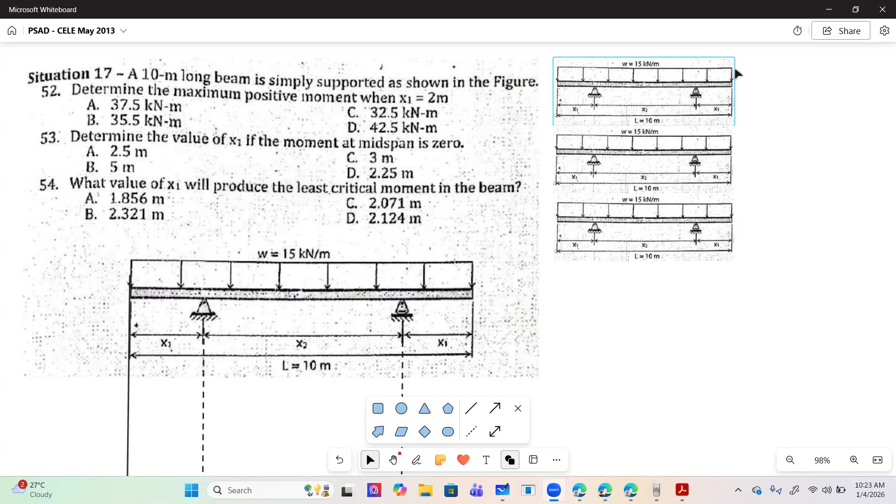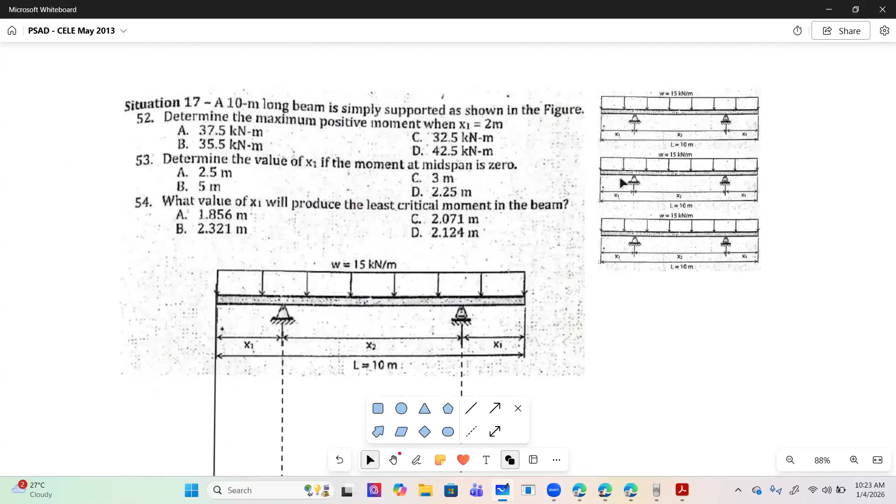Let's draw the shear and moment diagram real quick. We need this for visualization, so we can visualize it properly.

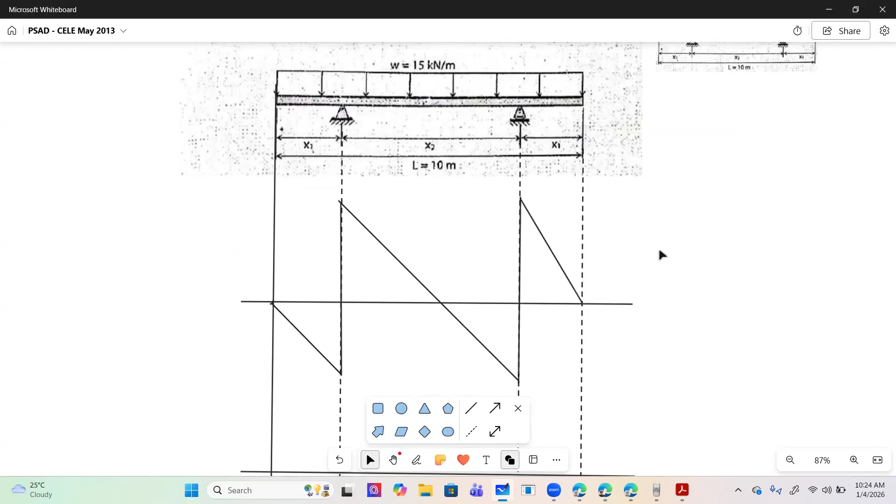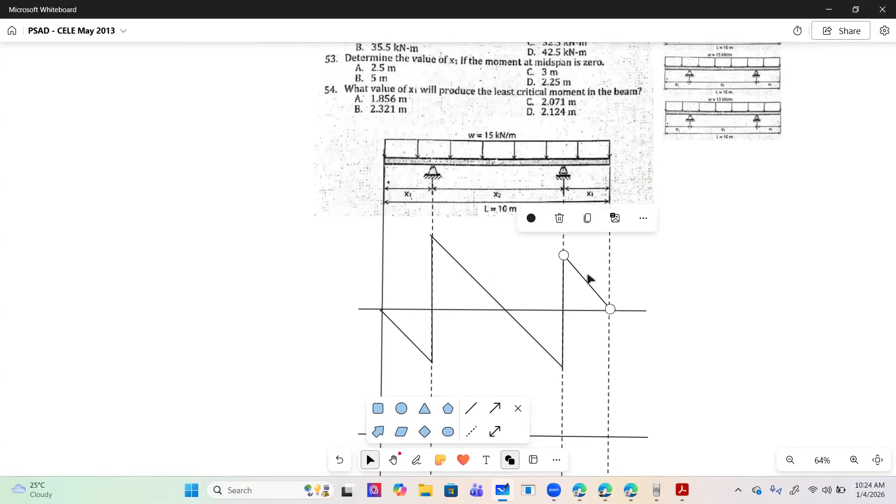That's the shear diagram. For the moment diagram, we should already master how shear and moment diagrams relate at this point. So for the moment, it's negative increasing, second degree, then positive decreasing. Actually, this is where the shear crosses zero, so that's where the moment is maximum, which should be at the middle, right?

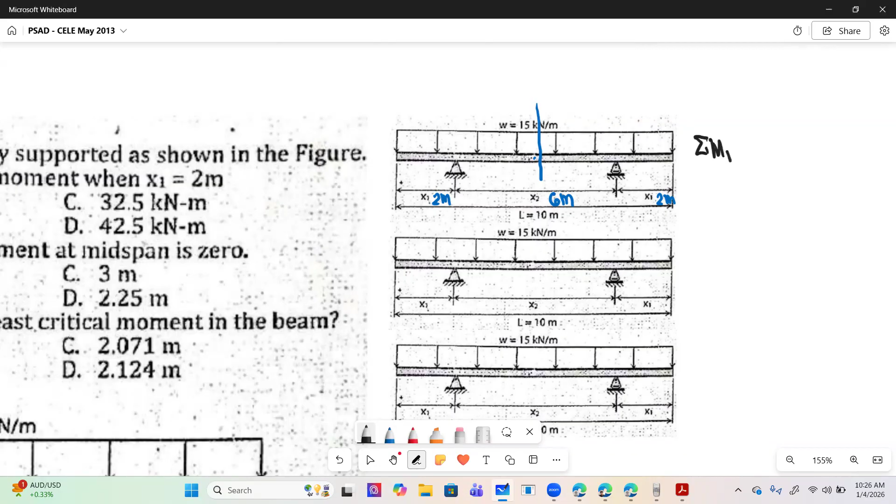So, summation of moment at midspan gives us the maximum positive moment. That's Mmax.

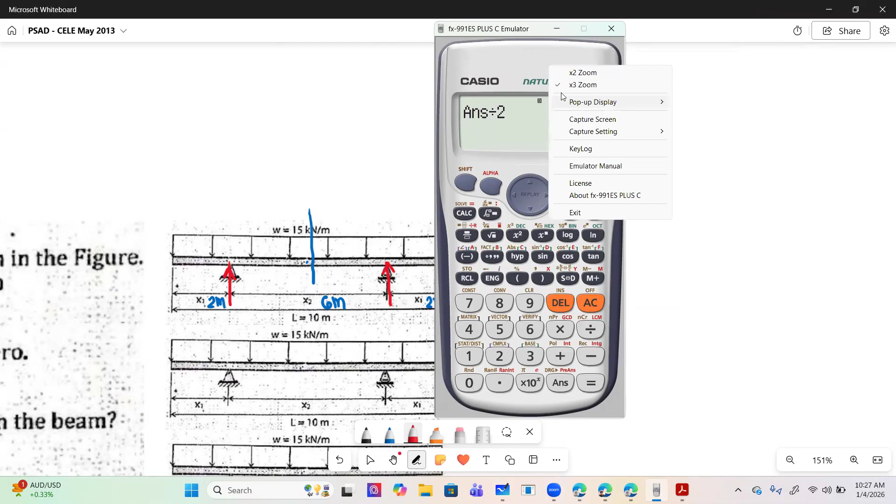So we have this maximum moment, M max positive equals 75 times half of x2, so that's 3. Then we subtract the negative part. Positive is what makes the beam smile, of course.

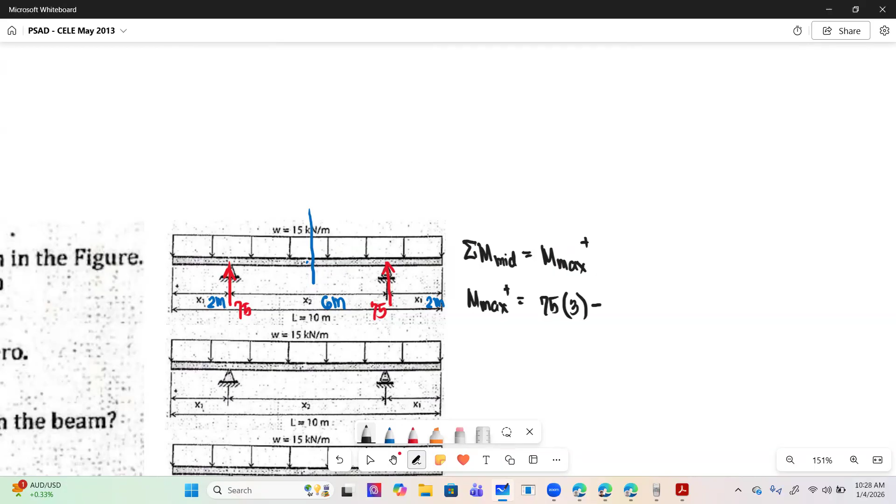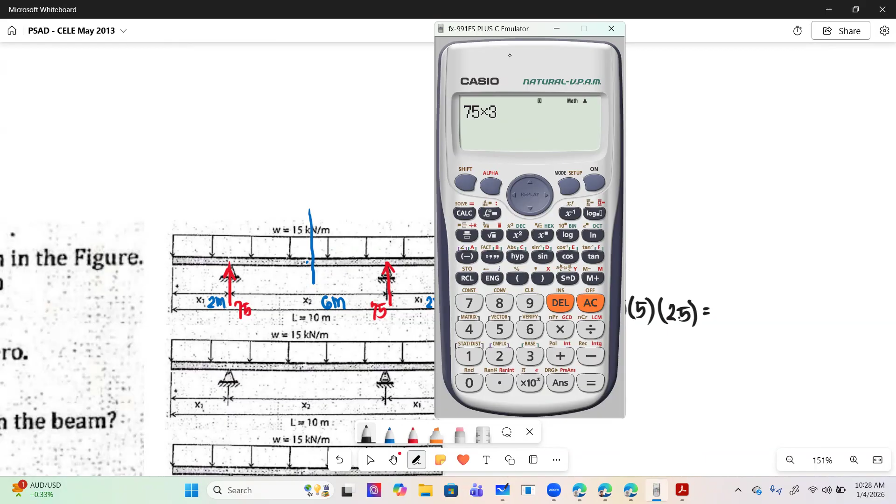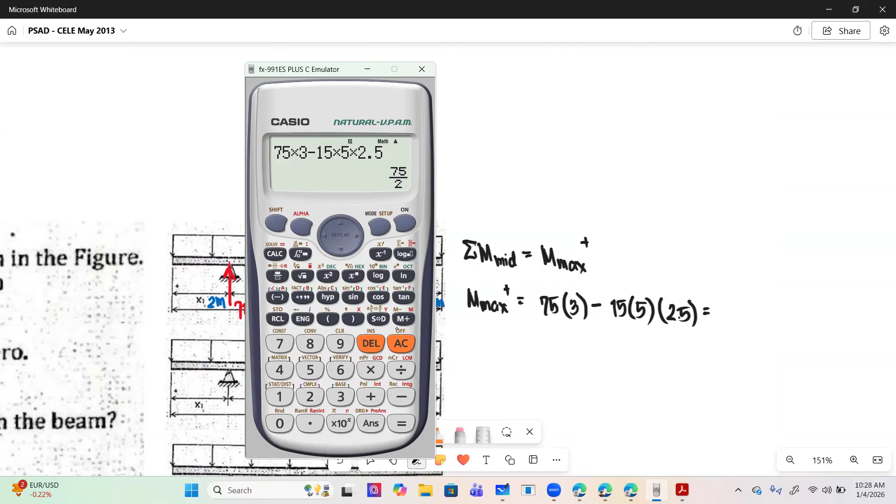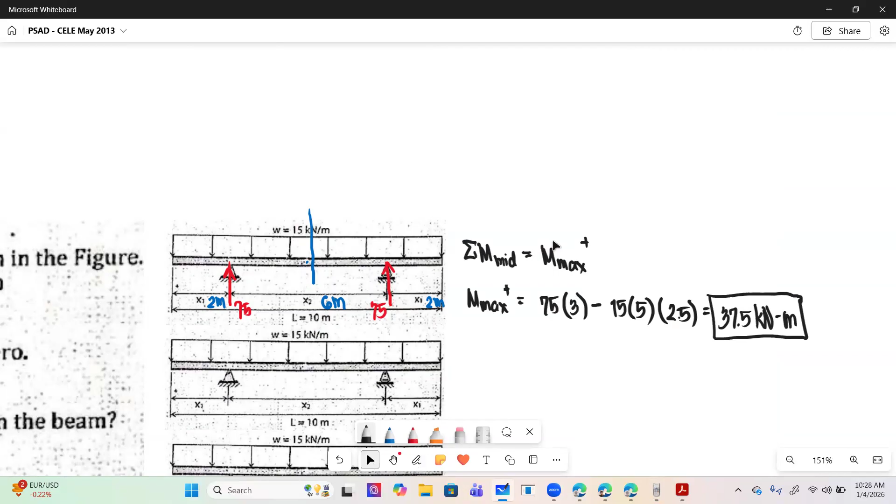So, 75 times 3, then 15 times half of 10, so 15 times 5, then half of 5 is 2.5. So that's 75 times 3 minus 15 times 5 times 2.5. So it has to be 37.5 kilonewton-meters. That's for the first problem.

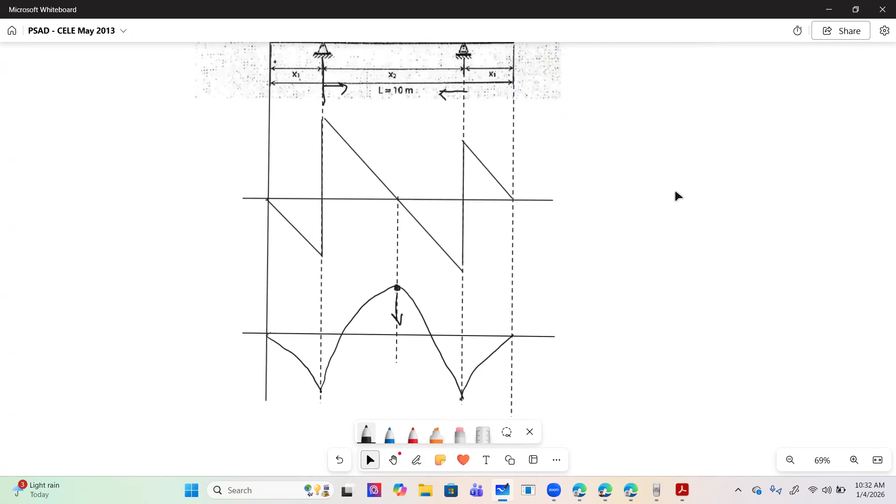Next, finally, what value of x1 will produce the least critical moment?

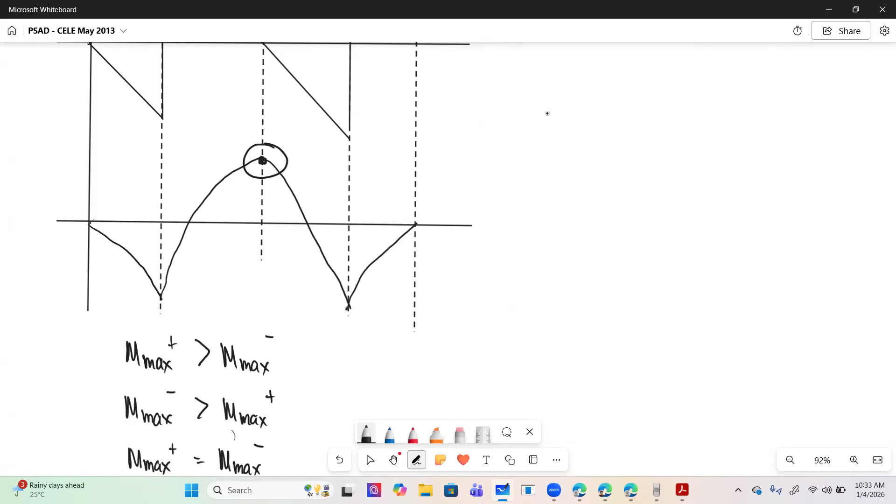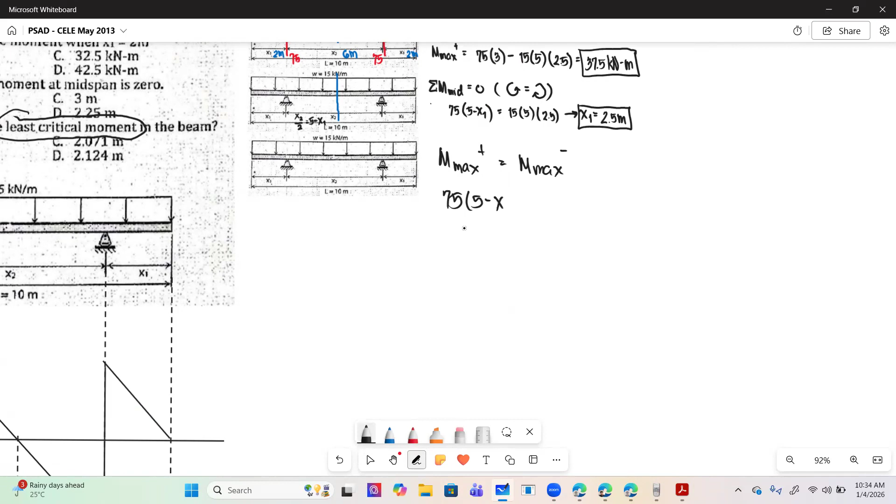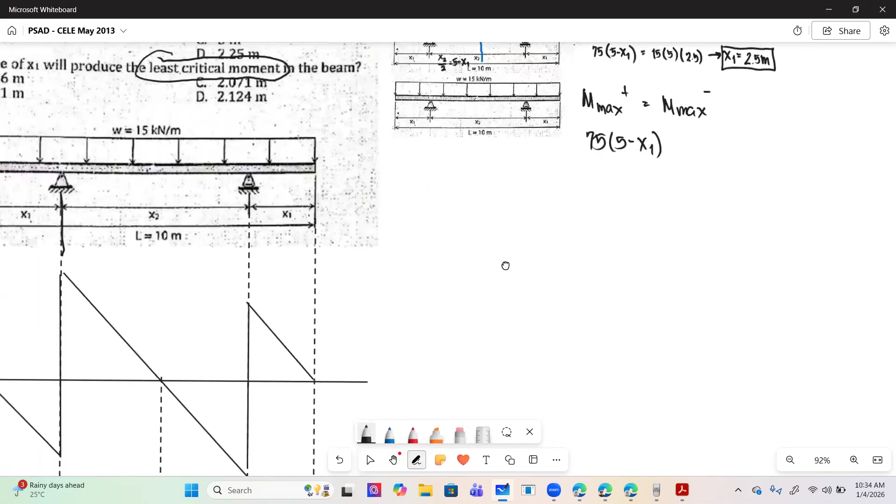For max positive, we're solving for the value of x1. So still the same setup: 75 times 5 minus x1. Okay, least critical moment. Then next, max positive... ah wait, positive pa lang pala that. So we subtract 15 times 5 times 2.5.

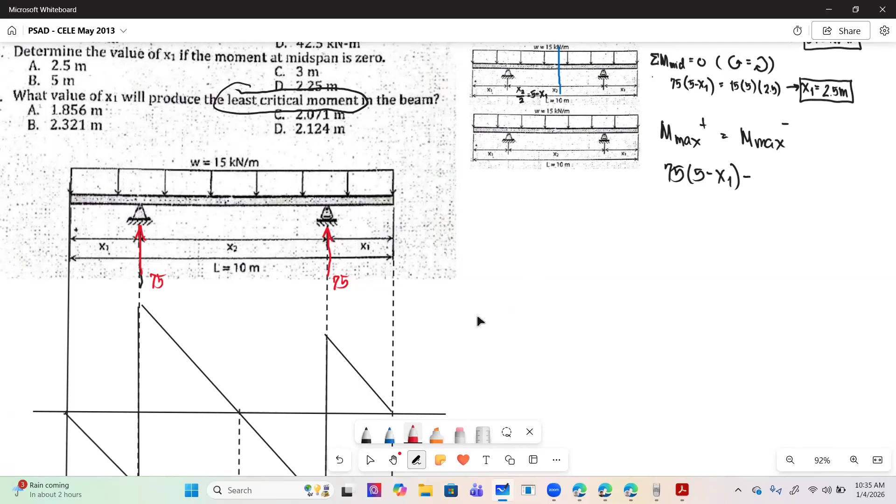This is the 75. For the 75 times, half of that is 5, so 5 minus x sub 1 - that's the moment arm. Then we subtract the counterclockwise 15: 15 times half of 10, that's 5, then half is 2.5. So this is the maximum positive moment.

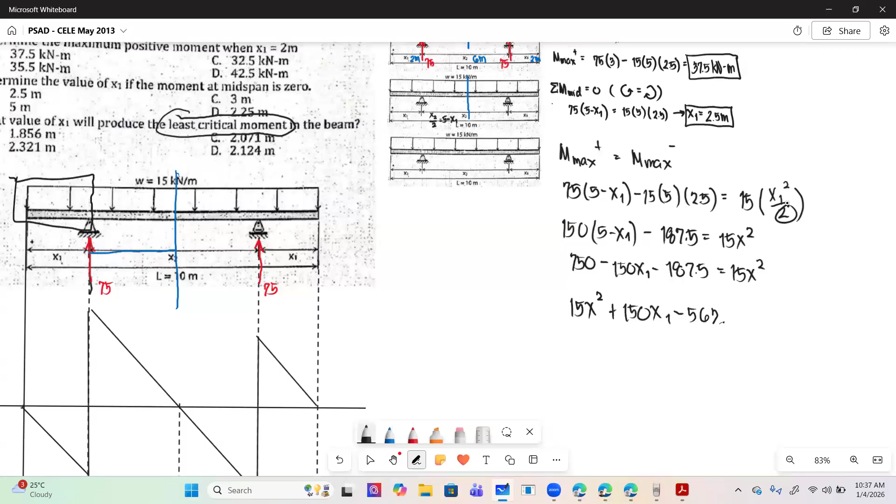And equal to 15x squared. So 150 times 5 is 750, minus 150x1, minus 187.5 equals 15x squared. Let's arrange: 15x squared, then move the positive 150x sub 1, then the constant is 187.5 minus 750, which is minus 562.5, equal to 0.

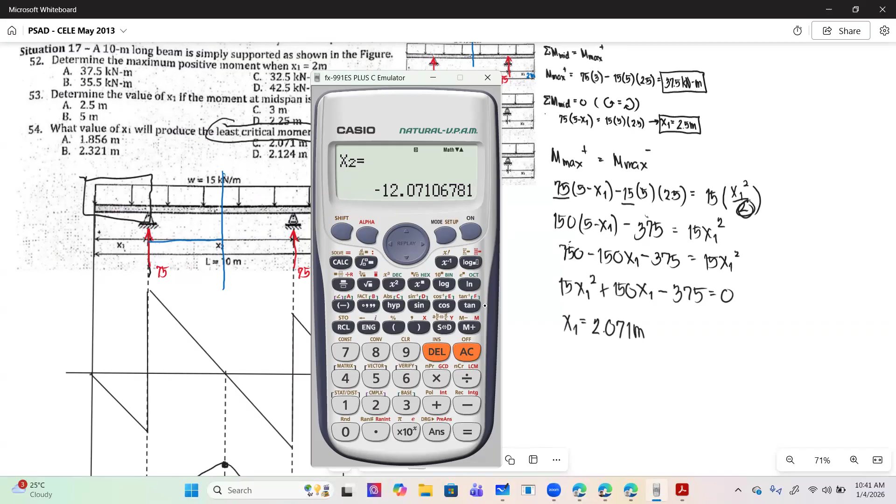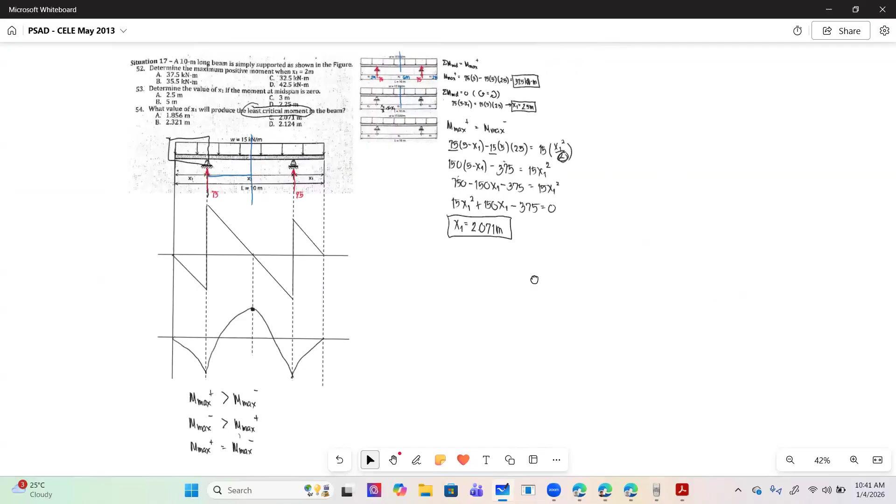That's it, that's how you solve this problem involving moments - bending moment. That's it. Thank you.